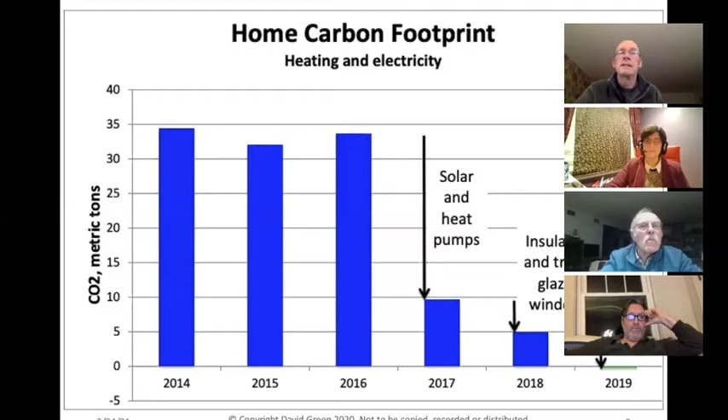Now, what was even more of a surprise than getting my home to a zero carbon footprint was that I'm saving $11,000 a year on heating and electricity bills. Now, most of you, if you're anything like me, I did not even know what my heating and electricity bills were with any detail before I dug into it. And when I dug into it, I was kind of horrified at how much our family was spending on heating and electricity.

And this is just for the house. It did not count the swimming pool. That was more on top. And then the cars were more on top of that again. So we were spending about $11,000 or $11,500 a year in the early years. Then it was cut following the carbon footprint in 2017 with the heat pumps and the solar panels, and in 2018 with the insulation and triple glazed windows, and then the additional solar panel array on the roof of my garage in 2019, bringing it to slightly negative for the full year.

Now, I'm not sure if Cheryl mentioned this, but I live in Dover. I don't live in Sharon, but I live just sort of next door in Dover. In fact, my kids used to go to Dover Sherborn High School. I used to drive regularly down to Sharon to take them sailing on the lake there.

And people may be wondering, well, David's got a big house in Dover, and Dover's one of the wealthiest towns in Massachusetts. Is this going to work for me? And the answer is yes. One homeowner who I've been working with is earning a better return on investment, 46% per year, and has cut his carbon footprint 38%. And this man lives alone. He's an elderly gentleman, lives alone in a small house on a small income. This approach works for all houses at all income levels.

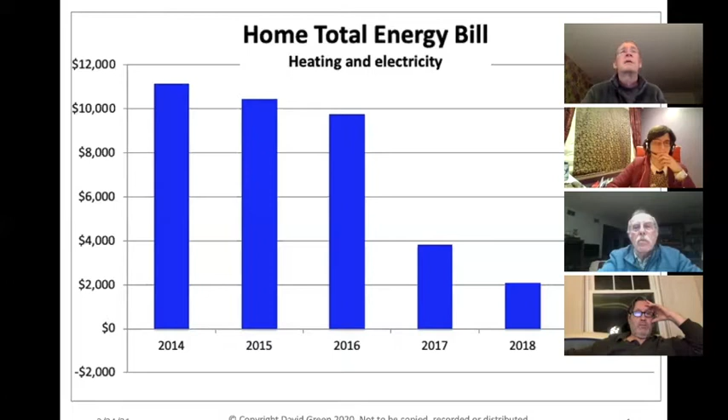So just a bit about me. I covered some of this already. I'm British, obviously you can tell by now. I got a degree in physics from Oxford and an MBA from Harvard, and I founded and was CEO of 2 different biotech companies, both of which I took public. I tell you all of this only to show that I have the scientific understanding to understand things like the low temperature performance of heat pumps, the low E coatings on triple glazed windows. I actually understand all that stuff. And in addition, I've got the finance experience to say which ones make sense from an economics or financial point of view.

And what I found when I set out to cut my carbon footprint was there was no guidebook. This kind of surprised me. I thought I'd just go to Amazon and order a guidebook, I'd go to Wellesley Bookstore, I'd go to the local library. I went to all these places. I could not find a guidebook to help me cut my carbon footprint.

And so I started going on the web and looking at blogs and websites of vendors and things. And what I found was all the information was sort of, it was biased. It was obviously people trying to sell me stuff without really telling me what the benefits would be. And so I found it all kind of confusing.

So I set out to go and do it on my own without a guidebook. And obviously I was successful in doing so. Both my house and my pool now have zero carbon footprints. And I'm saving over $11,000 a year on the house and over $3,000 a year on the pool. I wrote one book about each one: Zero Carbon Home, Zero Carbon Pool.

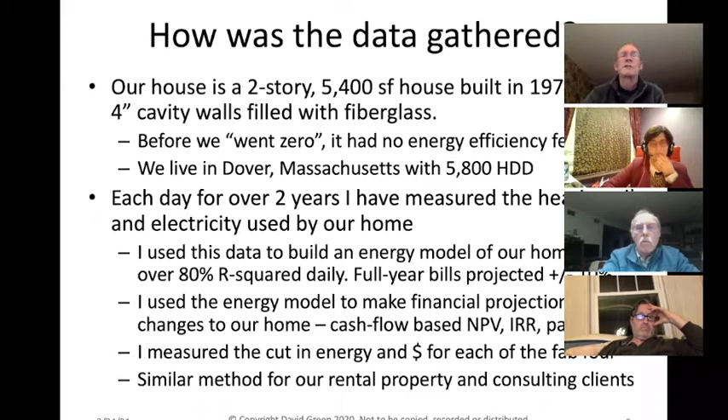And then I measured the cut in the energy use and the dollars for each one of the Fab Four, the heat pumps, the insulation, the triple glazed windows, and the solar panels after I added each one. And I've used a very similar method for our rental property, which I'll show you some pictures of later on, and for consulting clients who've asked me to help them in cutting their carbon footprints.

So you may be asking yourself, why now? Why are we having this conversation now? Because the environmental movement have been talking about this, going green, cutting carbon for decades, and yet all of a sudden, it's now possible to cut your carbon footprint and make money by doing so. And it's very, very simple. It's just the technologies have got a lot better. Insulation's got a lot better, heat pumps got a lot better, solar panels got a lot cheaper. They've got somewhat better, but really got a lot cheaper.

And triple glazed windows today are 8 times better than the ones you put in your house in the 1970s. 8 times. That means they lose 1/8 of the heat that a single glazed window from the 1970s would lose. Huge differences in the technologies. And in addition to the technologies, the subsidies from government, state and federal, are very significant. And so you can, by following these examples, cut the carbon emissions from your home to zero, save thousands of dollars a year on heating and electricity bills, and make a good return on your investment.

We have done it. So how do we cut our carbon footprint to zero? We installed the Fab Four: heat pumps, insulation, triple glazed windows, and solar panels. It's easy to remember this because the real Fab Four, that's of course the Beatles, I'm a Brit, I'm sure it shows, had lots of hits: HITS, heat pumps, insulation, triple glazed windows, and solar panels. So it's easy to remember. So how do we go zero and make money? By installing the Fab Four and getting all the tax breaks and subsidies.

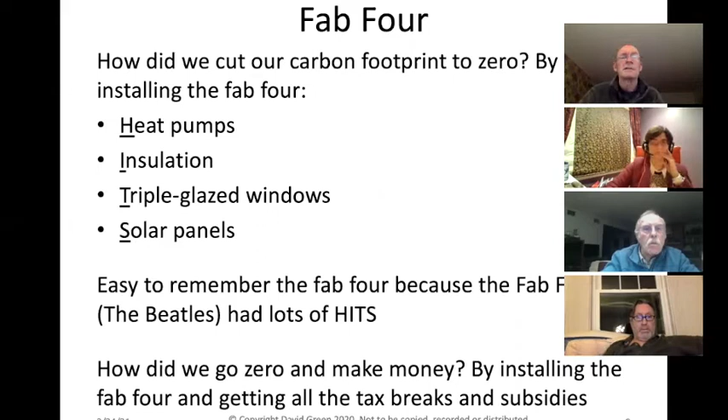So I'm going to go through each one of these in turn, heat pumps first, and explain what happened, and then I'll take a couple of questions. So if you've got questions now, or as we go through the heat pump section, just send them in to Paul, and he can read those questions out to me at the end of this section.

So this is the results of our heat pumps. This was the single biggest effect on cutting our carbon footprint, cut it almost in half by about 20 tons of carbon dioxide, saving us almost $3,000 a year, an investment of $26,000, paying for itself in about 9 years, and a return on investment of 9%.

That's 9% after tax. So if you were to compare this to a taxable investment like the stock market or the bond market, you'd have to earn a lot more than 9%. You'd have to earn maybe 12, 15, or even 18% pre-tax to get the same after-tax return. Very significant. These are very good returns. Any venture capitalist would be pleased to get these kinds of returns. Now, of course, there's no investment management fees on this. There's no volatility, and it's indexed for inflation, all of which are real pluses.

Now, in addition to all of that, a recent journal article in the journal Nature Energy, which is one of the world's top academic publications in this field, reported there is a 4 to 7% price increase for houses that have heat pumps compared to comparable houses that don't have heat pumps. So only the heat pump causes that increase in the house price. And that's on top of the 9% return on investment.

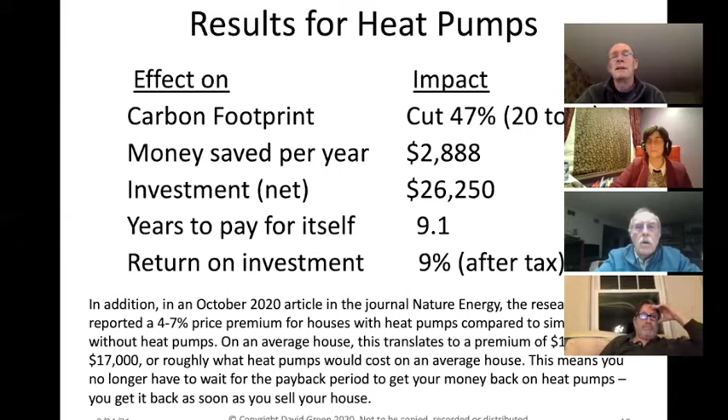So these are our heat pumps. If you think they look like air conditioning units, you're exactly right. They do, and they actually plugged into the same electrical breakers in our panel as the old AC units that they replaced. Our old ones were from the 1970s and 1990s. One of them was literally 40 years old. One was about 20 years old. They were completely decrepit, and we replaced them.

But rather than replacing them with AC units, we replaced them with slightly more expensive heat pumps, which both heat and cool the house. Now, they cool the house with the same efficiency as an air conditioning unit. But when the circuit is reversed in wintertime and they heat the house, they're heating with 2.5 times the efficiency of a furnace or boiler. This is a very big change in the efficiency of heating our house or your house. And this is a big contributor to cutting our carbon footprint and our bills.

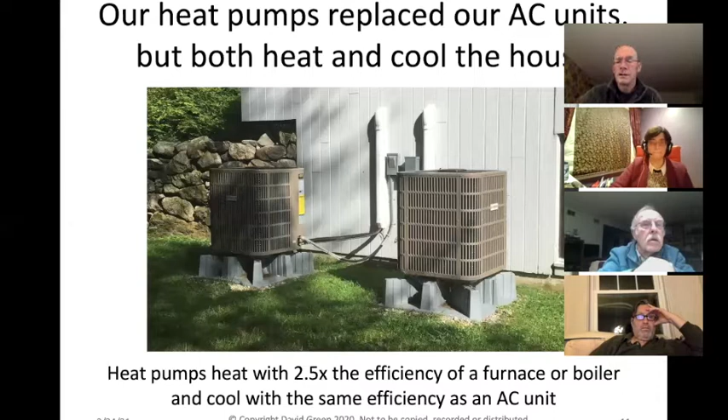So let me just explain a bit about how heat pumps work, because this is often confusing to people. I find this is widely misunderstood. People think they're not familiar with heat pumps. It sounds like something they've never heard of, but it's not true. Everyone is familiar with heat pumps because there's one in your refrigerator. And what that does is it moves the heat from inside the refrigerator, making the inside cooler, making your milk cooler, and moves it to the back of the fridge.

So if you've ever put your hand down the back of a fridge, it's warm. And you'll see that long row of thin black metal pipes. That's where the heat is coming out. That is the heat that was in your milk. It's been removed from the milk and pushed out the back. So it's cooling down the milk, and it's warming up the air in the kitchen. In fact, I can remember when I was a kid, my mother used to start trays of seedlings in the spring on top of the refrigerator because it was warmer up there and the seedlings would sprout faster. So that's how a heat pump works in your refrigerator.

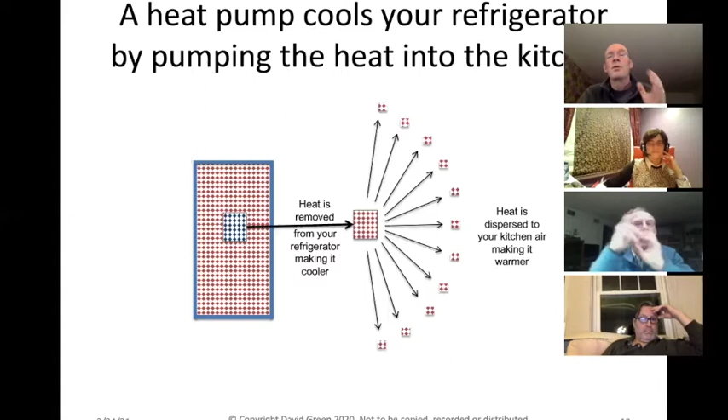Now just imagine that on a larger scale, the size of your house, a refrigerator the size of your house. That is an air conditioning unit. It's cooling down the inside and heating up the outside. So if you go outside and you put your hand over your air conditioning unit outside in the summertime, it's really hot. So it may be 80 degrees in your house and you're cooling it down to 75 or so, over the air conditioning unit outside, it'll be 100 or 110. Very, very hot, because that's all the heat that was inside your house that has been removed outside and is now warming up the air outside.

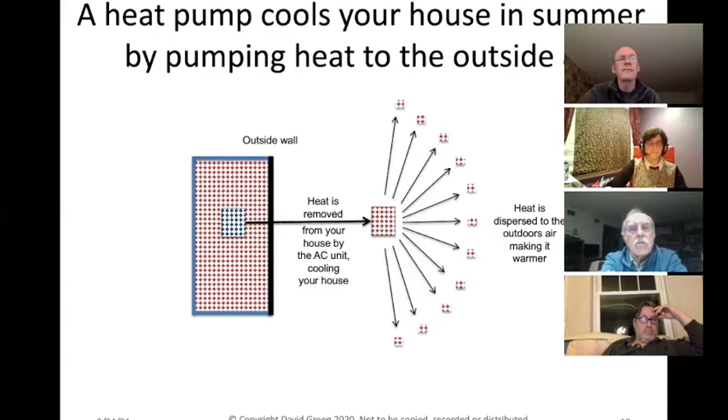Now, imagine reversing that cycle in the wintertime. And now the heat pump is moving heat from the outside to the inside. Now, this is a bit more counterintuitive because it's cold outside in wintertime, so a lot of people ask themselves, well, how come there's any heat in the air?

How can you take the heat out of the air and put it inside if there's no heat in the air because it's cold? Well, that's because the temperatures we have around here, say 30, 40, 50 degrees Fahrenheit, are nowhere near something called absolute zero, which is where heat really ends. So as long as the temperature is above that, you can take the heat out and put it into your house, but the necessary consequence is you cool down the air outside.

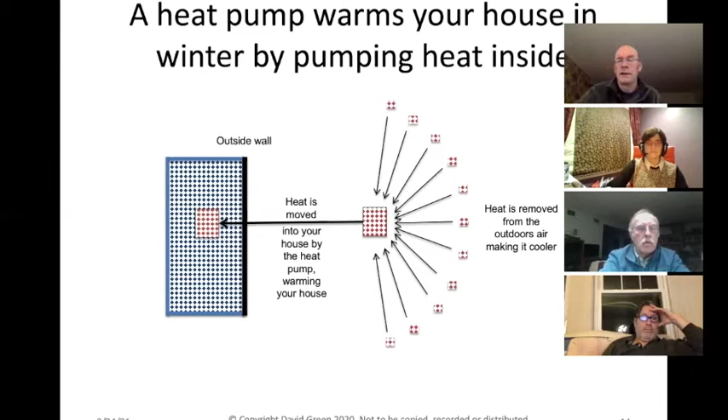And I'll show you this. This is me. On the left-hand side, I'm measuring the temperature of the air going into my heat pump. It's a very cold winter's day. It's 4.7 degrees Fahrenheit on the outside. You can see I'm wearing gloves. You can see the snow on the ground. On the right-hand side, I'm measuring the temperature over the heat pump on the exhaust side, where the air is coming out. And you can see it's minus 19.6 degrees Fahrenheit. Unbelievably cold. In fact, it's so cold, if you put your hand over this, you get frostbite.

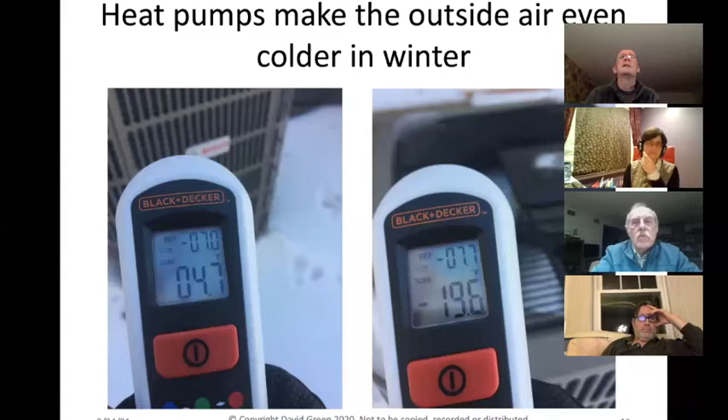So this is showing you how the heat pump is removing heat from the outside air, making the outside air colder still, very cold, and that heat is moved into the house and is making my house nice and warm. This is how heat pumps work to heat your house in the wintertime. Now, what I just showed you was at our home where I am right now, which is where we have ductwork. We had the ductwork before we bought the heat pumps. We had it for the air conditioning and for the forced hot air heating system.

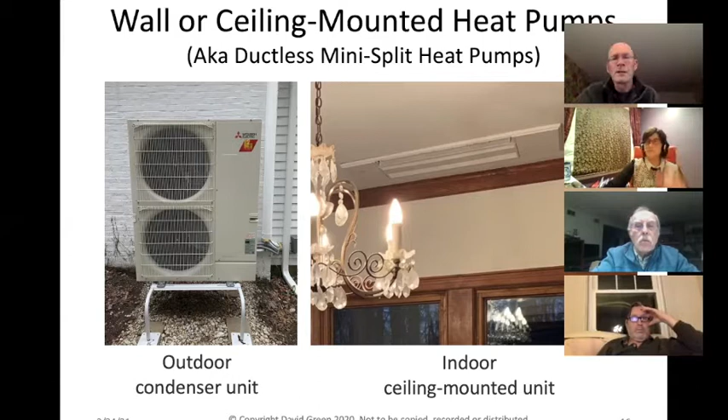These are pictures of our rental property, which does not have ductwork. So we put in what are called ductless mini split units. It's the same technology, heat pumps, but you can see the outdoor unit there, and on the right-hand side you can see the ceiling-mounted indoor unit. I paid a bit extra to get the ceiling mounted units. Often these are wall mounted units or sometimes floor mounted units. They perform the same function. I just thought the looks of the indoor ones was better. So these ones are from Mitsubishi. The ducted system at our home was from Bosch. For details on which heat pumps we bought and why, and the zero interest loans that are available, please see the book Zero Carbon Home, which you'll get at the end here.

Now, I do not recommend geothermal or ground source heat pumps. They will cut your carbon footprint. They're very good at that. We had a quote to do this on our house. It was $98,000 compared to the $26,000 for heat pumps. So it's 4 times as expensive. This is mostly the cost of drilling the wells. The pump itself is fairly similarly priced. This is one of those things that made energy sense, but did not make financial sense. And there are several things I'll refer to here that we looked at and didn't do, mostly because they made energy sense, but did not make financial sense.

And finally, leave your furnace in place. Most heat pumps in New England will not be able to keep your house at 70 degrees if the outside temperature is below about 20 degrees. We have 2 instances here. Our house, where we have the Bosch ducted system, can't keep the house at 70 degrees if it's below about 20 degrees outside, and neither can the Mitsubishi ductless system in our rental house. So that's the reality on the ground with these pumps. This is despite the claims of some manufacturers, who will tell you these cold climate heat pumps will work at minus 14 degrees Fahrenheit. Well, it's just not been my experience. And so leave your furnace in place.

So what you're really doing here is replacing your air conditioning units. You are not replacing your furnace. You're replacing your air conditioning units with heat pumps that will both cool in the summer and heat in the wintertime. So let me just pause here for a minute, Paul, and let's take a couple of questions on heat pumps. Okay. First question is, how do you measure your carbon footprint in metric tons and track how much you're saving with each change?

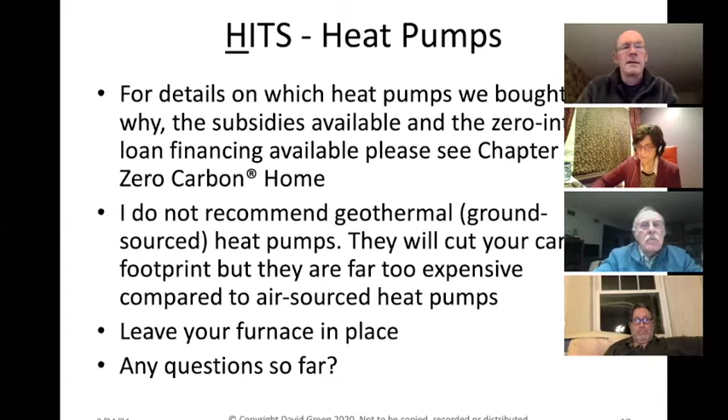Okay. So insulation, that's the next part of it. So insulation cut our carbon footprint about 16%, about 7 tons, and saving us about $3,000. This is more than the money saved by the heat pump. But the heat pump cost us $26,000. The insulation cost me $1,000. It's so much cheaper, and it pays for itself in under a year. Over 100% return on investment.

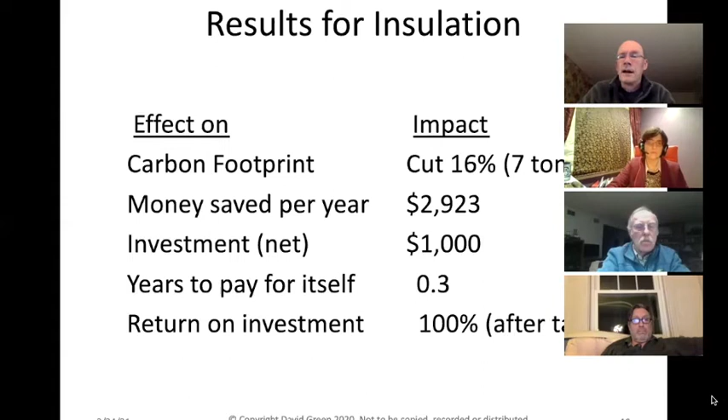More R is better. And the 2 layers of iso board at about R20. So a total of R50 between the two. That's a very well insulated roof.

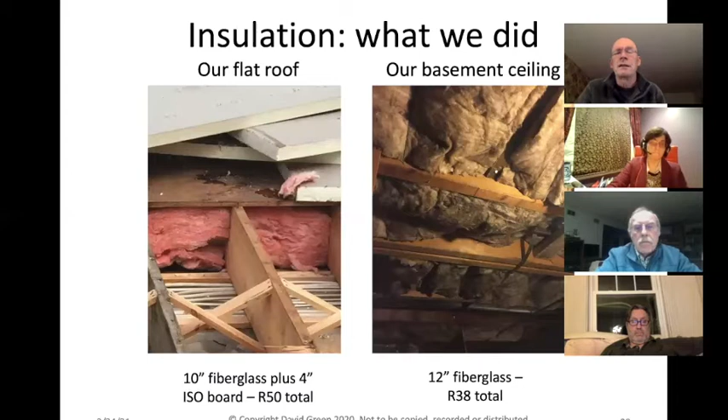On the right-hand side, you can see the ceiling of our basement. That's the fiberglass that I added myself. I literally just pushed it up between the rafters there. It kind of stays by friction. And that gave the ceiling of our basement R38, up from maybe R1 before I did this. That had a very, very large effect on cutting our carbon footprint.

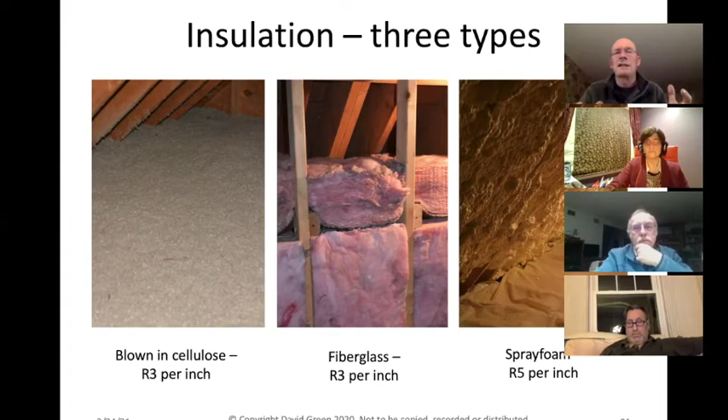But it's worth pointing out that it is not the cellulose in blown-in cellulose. It's not the glass in fiberglass. And it's not the plastic in spray foam that insulates. It's the air they trap. Air is a very good insulator, and that's why we try to encapsulate air and stop it moving around, because that's what provides the insulation benefit.

Now let me talk about air sealing for a minute. Air sealing and insulation often go hand in hand, and if you get Mass Save, which I'll talk about in a minute, get a Mass Save contractor to do insulation for you, they will almost always do the air sealing at the same time. Air sealing is very cheap. We're just talking about blocking drafts. So a can of spray foam is the only technology you need. You can get it from Home Depot for a couple of bucks. It's great fun, by the way, to go around filling holes in the basement or in the attic with spray foam. This can cut your energy use 25%.

This has been my clients' experience. And it's also very similar to what the Department of Energy says, that an average house loses about 30% of its heat through gaps and cracks in the walls. A major academic study found that insulating attics in row houses cut the energy use 8%, but insulating and air sealing cut it 18%. So this is clearly well worthwhile doing.

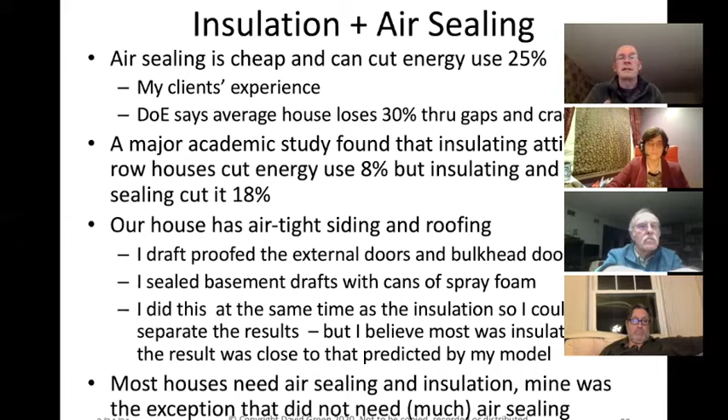And our house was quite airtight. Just its construction is pretty good. Just having a flat roof with a rubber membrane makes our roof airtight as well as watertight. And that prevents a lot of the normal air and drafts in houses compared to a typical A-framed roof, which has a lot of gaps and cracks in it. So this was not a big deal on our house, but it is a big deal on most people's houses. And most people will need both air sealing and insulation in order to get their carbon footprint down significantly.

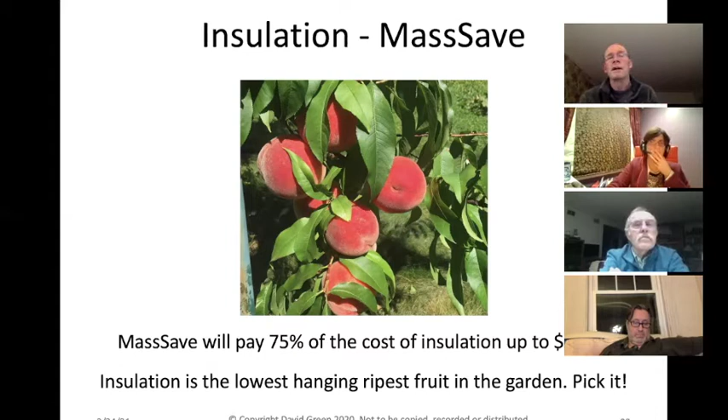Mass Save, I mentioned, Mass Save will currently pay 100% of the cost. They're even more generous than when I wrote this slide. 100% of the cost of insulation up to $2,000. This picture here is of peaches on my peach trees. In summertime, you can see the grass there. The branches are way down, almost to the ground. So this is the lowest hanging, ripest fruit in the zero carbon garden. So pick this by the bushel, because insulation will give you the best return on investment and will cut your heating bills and your carbon footprint significantly. So details on which type are all in the book in chapter 1.

If you don't live in Massachusetts, you can go to this website, dsireusa.org, where all the state incentives are listed state by state. So you can look up the California ones or the Iowa ones, and you don't have to just base it off the Massachusetts ones. Massachusetts is very generous in its subsidies. The Mass Save subsidies in particular are probably about the most generous in the country. The solar panel subsidies are on the high end, but they're probably not the highest.

And for insulation, I do not recommend that you take off your siding boards and thicken the walls with insulation and replace the siding. This is quite popular in the green building community. We had a quote to do this on our house. It was $150,000. I mean, the labor time involved in taking the siding off is just very, very high. So it's, again, one of those things like geothermal that makes energy sense. This will absolutely, definitely cut your carbon footprint.

It will cut your energy bills. It just won't cut them very much. And so it won't pay for itself. It's very expensive and it doesn't save you much money, so it'll never pay for itself, at least not for decades. So this is something I do not recommend doing.

So let's just pause here, Paul, and take a couple of questions more on insulation. Yeah, with more insulation, do you have to worry about ventilation? Not really. If you build a new house and you do it super tight, really, really tight construction, so you get almost no drafts whatsoever, then yes, you can get into problems with ventilation, and you can get mold, and that can cause asthma and all kinds of things. So you definitely don't want to get that tight.

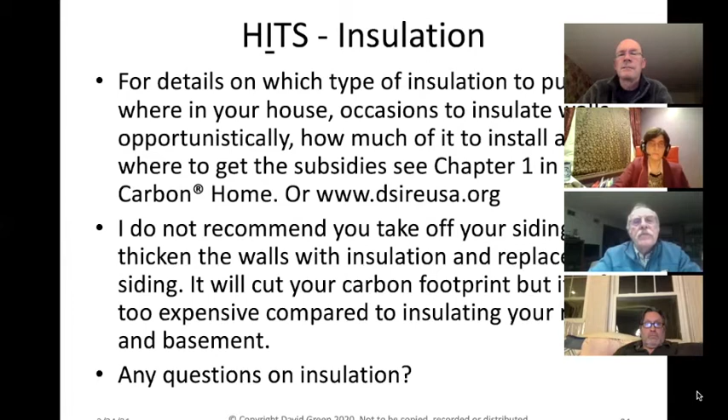Okay, let's go on to the third part of HITS, the Fab Four, T, triple glazed windows. So we added these, and they cut about 5% of our carbon footprint, about 2 tons per year, saving us about $1,000, cost us only about $5,000 to put them in, pays for itself in under 5 years, with a 19% return on investment, again after tax.

Now you may be saying that's an awfully small amount of money to spend on a window. This is the additional cost of triple glazed windows above and beyond the cost of double glazed equivalents, and it's the additional savings on triple glazed windows above and beyond double glazed equivalents. And the reason we did that is because we had to replace our windows anyway. So it's not like we were ripping out perfectly good windows and replacing them, which I don't recommend you do. Our windows were falling apart.

And if you're in the situation where your windows have to be replaced, it is a much better financial investment for you to spend a few bucks extra and get the triple glazed, because it'll save you money and pay for itself in 5 years, rather than getting double glazed. But if your windows are perfectly good, there's no point ripping out perfectly good windows to replace them.

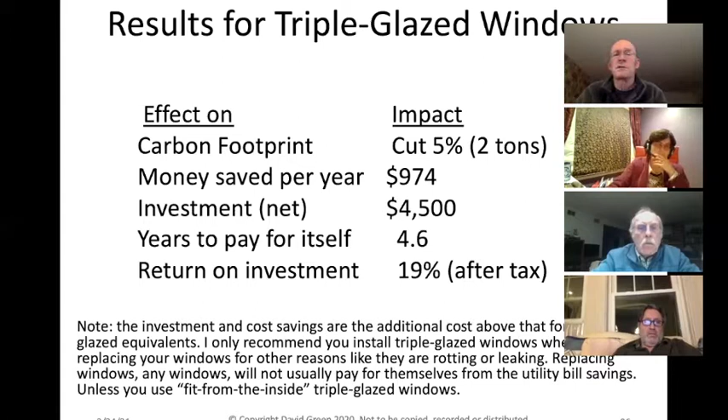If you do have perfectly good windows, I recommend something different, which I'll show you in a minute, which are window inserts that you can fit from the inside of the window and add a pane of glass. So if you've got double glazed already, you've now got a triple glazed window, but it costs you $200 a window, not thousands of bucks, which is what new replacement windows would cost you.

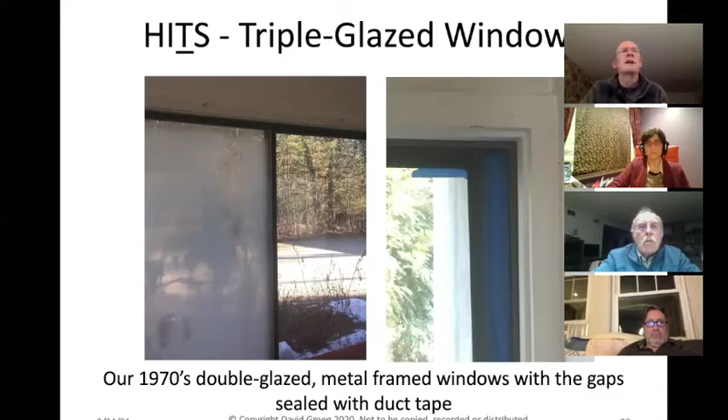So these are the new windows in our house. In fact, I'm just going to skip ahead and just show you. These are the old windows in our house. These are the 1970s era double glazed, and you can see that the panel has misted up on the left there. This is common in panels in double glazed windows from the 70s and 80s. And on the right, you can see where the duct tape is covering up the gaps in the window, where the house has subsided a little over time, and there's now a 1-inch gap there between the frame and the window.

Even with the heating system turned fully up, the heating system could not keep the living room at a pleasant temperature. That has all changed now. These windows don't have air blowing through them like the old ones did. They don't have cold air dropping down the window because they're much warmer because of the triple glazing. And they also look much nicer.

And this really has transformed the way our house looks and the way our house feels, and it lives much better. We live in this living room far more than we did in the past. It was just too cold in the past. These are the ones that have now gone. So what is a triple glazed window, particularly one with low E coatings, which I'll explain in just a minute?

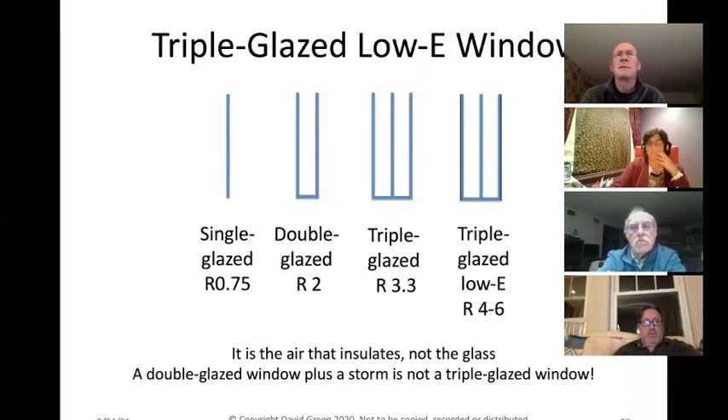Now, the Lawrence Berkeley National Laboratory has studied low E coatings on windows, and they've concluded that Americans have saved cumulatively $150 billion on heating bills just from having low E coatings on windows, which is not bad for something that's completely invisible.

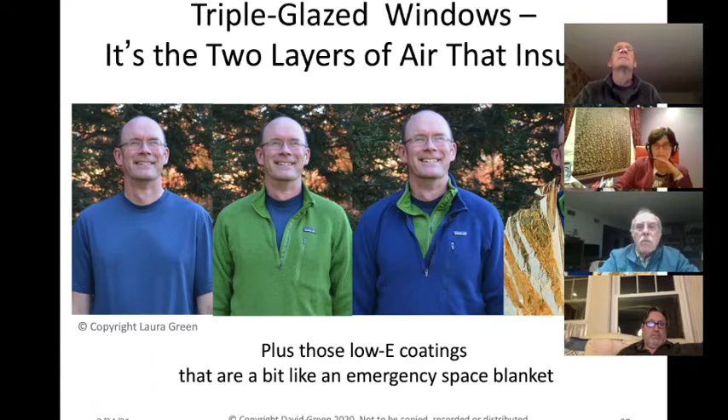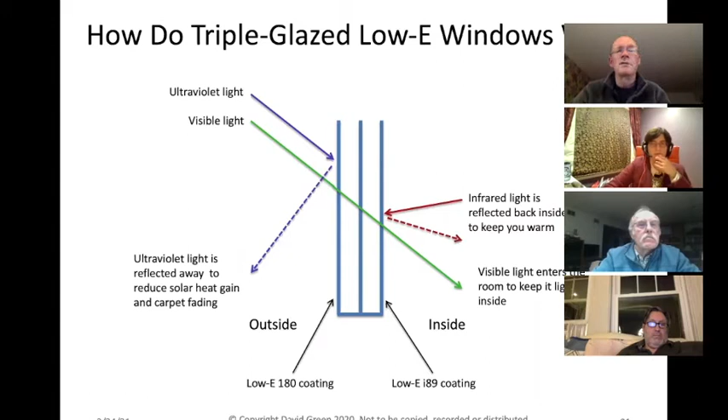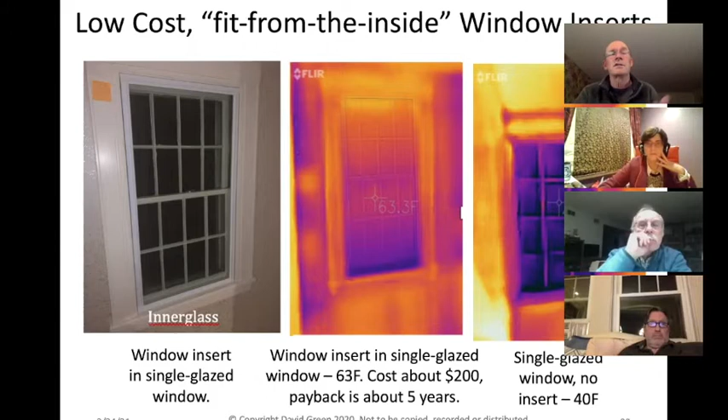And I do not recommend that plastic stretchy film you can buy at every hardware store. It's like saran wrap, but you go over it with a hairdryer and it stretches out. I've tried that. It does work. It does actually insulate your glass, but that sticky tape pulls the paint off the frames when you take it off. And that's if it works pretty well.

If it works badly, like it did in my case, the glue came off the sticky strip and attached itself to the window frame, and I can't get it off. So I walked away with a nice strip of plastic in my hand. The glue is still on the frame. I can't get it off, and there's this nasty sticky strip that is collecting ants and flies and ladybugs and things as they crawl across it. So I really don't recommend the stretchy film.

If you want to do that, get the fit from the inside windows, because they're only about $200 and they work far better than that stretchy plastic stuff, and they won't take the paint off your frames. Paul, let's stop here for a couple of questions on triple glazed windows.

Okay, can you apply a low E coating on an old window? So no, you can't. Low E is actually a metal, and the metal has to be vaporized and deposited onto the glass. That's a very high temperature process. You can do it in a factory, but you can't do it at home. So you can't add this to existing windows.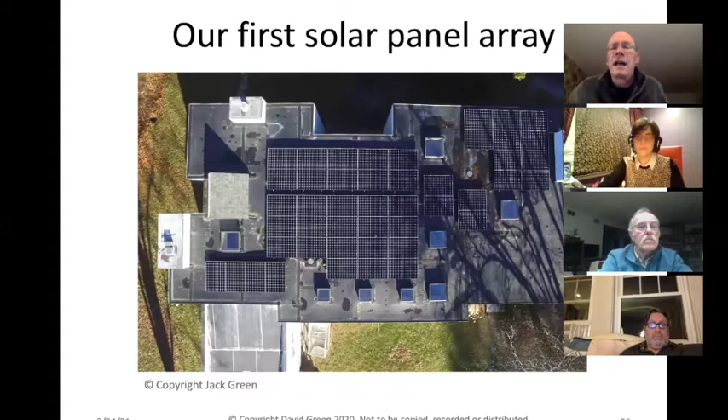This is our solar panel array on our roof. I mentioned it's a flat roof. You can see the rubber membrane in the background there with the solar panels on top. This is how solar panels work. Light comes from the sun, hits the solar panel. Some very fancy quantum mechanics happens, but you just don't care because electricity just pours out the other side.

And the electricity that comes from a solar panel is something called DC, or direct current electricity, which is the kind of electricity you have in a battery, and your car uses DC electricity. But all of your appliances in your house use AC, or alternating current. So the DC is converted to AC by a device called an inverter that's fed to your meter. Your meter continues the connection to the street, so you can always have power from the street if your solar panels aren't producing, like at night, and then that power is fed to your house to power all your appliances.

Now, when you install solar panels, your utility company will replace your existing meter, which is a one-way meter, with a net meter that reads electricity flowing both ways, so they can give you credit for the solar panel production. In the summertime, you're going to be producing far more electricity than you can use, and then you get a credit for that on your bill, and you can draw down those credits in the wintertime. So for the full cycle of the year, you can have a zero carbon footprint.

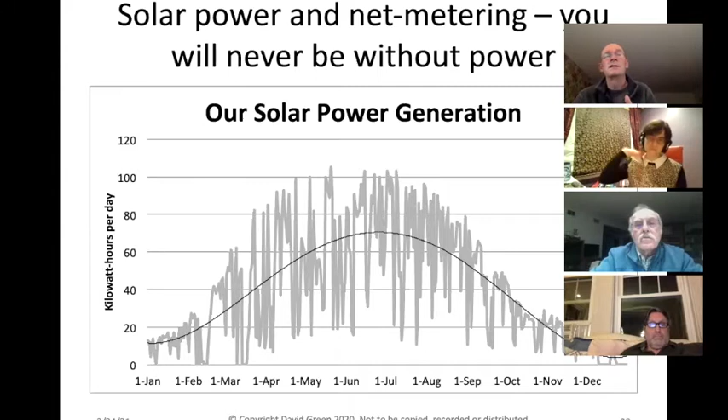And that's why net metering is the law in 44 states, because it's essential to getting solar panels to be widely adopted, and the whole process is completely invisible to you. You never notice it at all, unless and until you see the much lower electricity bills.

The present value of the future income, which I'll get from the SREC program. Now, SREC has been replaced by SMART. I'll explain that in just a minute. That was about 23,000. So the net cost is only 14,000. That's a huge reduction from 56 gross costs. I only ended up net paying 14,000.

Now, this array is guaranteed to produce power for 25 years by the panel manufacturer. And just taking that guaranteed number of kilowatt hours, the electricity is costing me about 5 cents per kilowatt hour compared to Eversource or National Grid at 24 cents. This is a huge reduction in the cost of electricity. The net present value or total profit I make on this investment is about $29,000, and the return on investment is about 14%. That's after tax. So it pays for itself in about 7 years.

Now, I do have some consulting clients, and I've recently bid out solar panels for one of those clients. And the recent bidding, which is under the new subsidy scheme, the new one is called SMART, the old one was called SREC, came in the 4 to 6 cents per kilowatt hour range. My array in 2017 is producing power at 5 cents per kilowatt hour. So it's still as good today, even though tariffs have gone up on solar panels, even though the subsidies have gone down on solar panels. The net cost is now lower than it was even 3 or 4 years ago when I put my solar panels in place. So it's still extremely good value for money.

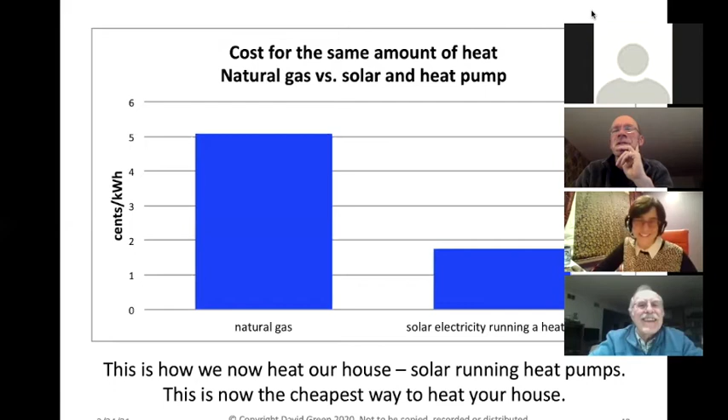Yeah, and I just want to take this opportunity to thank you again, David. This was really helpful, really informative. We appreciate everything you're doing and sharing this great information. I'm just wondering, people can hang around here as long as they want to ask questions. For some of us, it's a school night. Yeah, of course. So anyone who wants to go, please go. I don't want to keep you. And how do we get the link? Hang on, sorry, yes. Let me get that. I was taking too long.

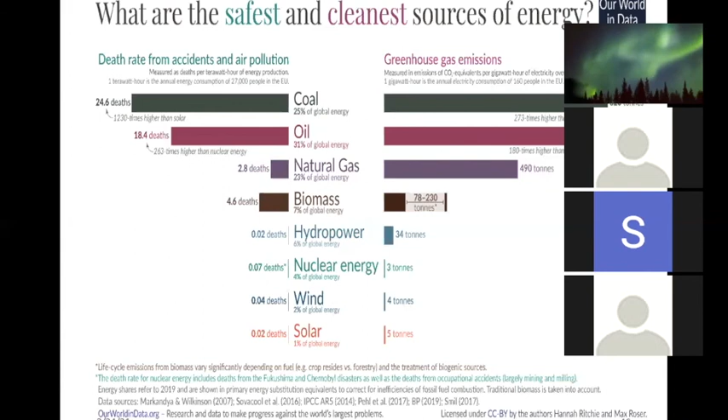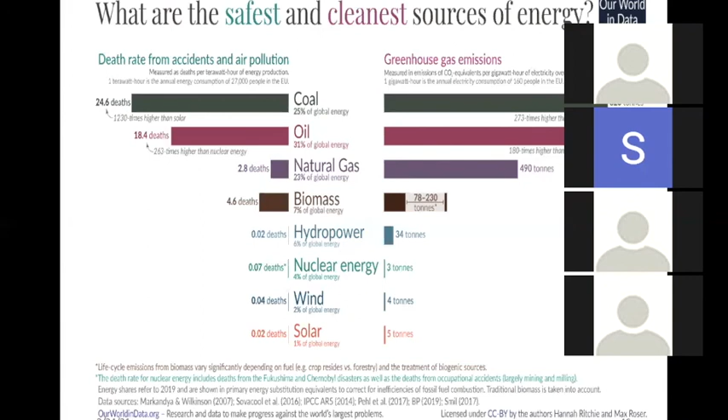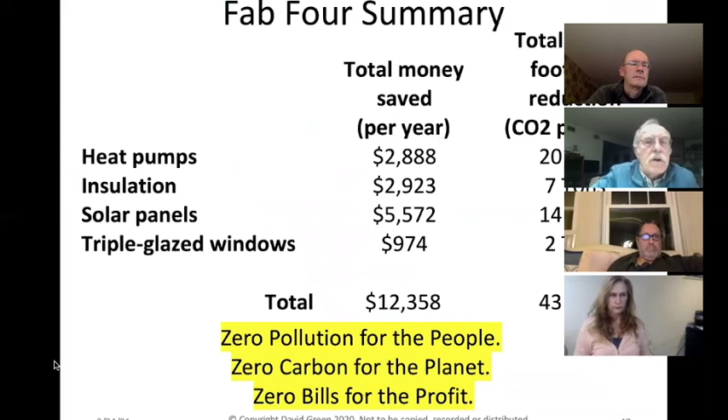Okay, thank you. Those are interesting comments, as you point out, Irina. The fact that we're making a radical transition now could have unintended consequences with respect to health and the environment too. We take it as sort of an assumption that if we make this change, there aren't going to be any problems. And actually, David did show that graph, which showed much less health consequence, along with much less environmental consequence of these various clean energy sources. And we have to ask the question also, if they're not perfect, maybe they're still a lot better than burning fossil fuel, but still, these are legitimate concerns, and the questions need to be asked and answered.

And the other thing that I wanted to ask was, oh my God, I blanked out. I was going to say something and then I lost it as we were talking, but it'll come to me. It's okay. Well, I'm already reading about the biogeometry harmonization. Biogeometry, yes. As we're sitting here, I'm reading about it right now.

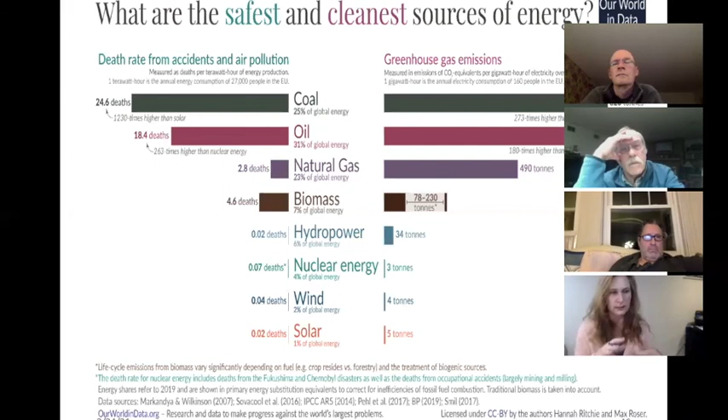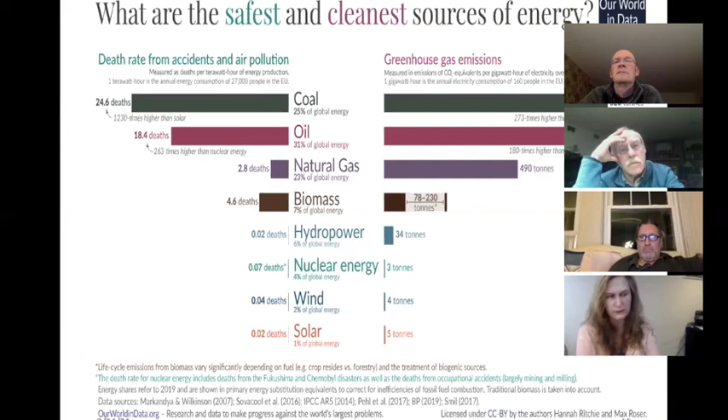So yeah, it's actually something that I was trained in. And of course, I don't want to be a practitioner of it, but I am very versed in knowing how to use it for my design. And this is something that I think is going to be more and more around. These are architectural designs you're talking about? Yeah, architectural design. So any home can be designed basically by shapes, right? Typically architects will talk about the beauty and the aesthetics of it, but with this you can actually measure the centering quality of shapes, and that will allow you to position the home or do certain things that would enhance the same natural qualities that are found in nature into the home and into the building.

And this can be done with existing buildings, or it can be done with new construction or new designs. And so I'm very much into understanding, I just thought of what it was I wanted to say, the carbon statistics of where all this research is coming from that is saying how detrimental carbon is to our Earth. Now, what happened with other sources of pollution, like the California fires?

Are those things that are happening around us even more, and we're sort of allowing it to be the carbon problem, right? But yet in nature, carbon is not the enemy. So, I don't know, I'm still fresh on understanding what the carbon problem is right now, and I need excellent sources to say, this is what has been measured, this is where we're at. What stage of sustainability are we all at?

We've been around for 50 years now doing sustainability. How much have we shifted? 1 degree, 2 degrees, 0 degrees? And we're going now to an electric world, right? I mean, until fossil fuel gets completely eliminated, I don't see any of this happening. And it's not going to happen until 2030, maybe 2040. We're supposed to be net zero in New York by 2050. And from now until 2050 is a while.